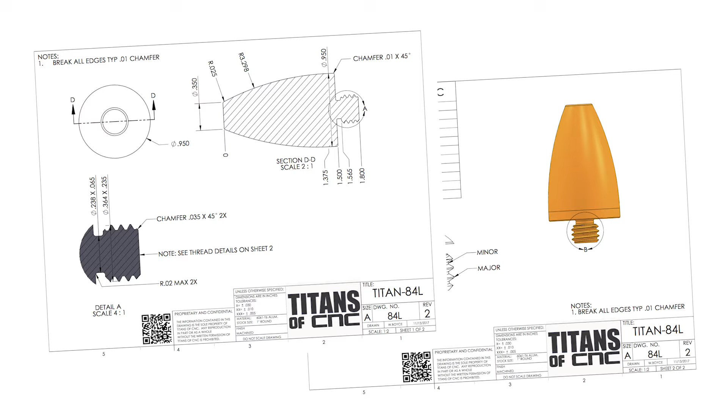The very first thing we're going to do before we start programming the part is make a small edit to the model. Make sure you're in your model workspace, go to your timeline, find where your thread is, right click on your thread, and hit Edit Feature.

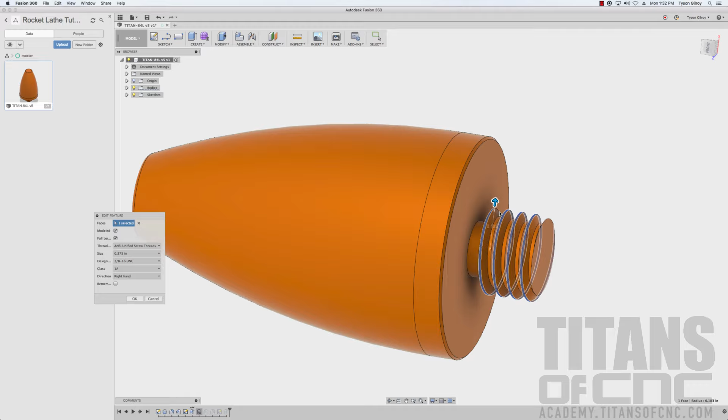The threads do look good in 3D, I really like them, but they're going to get in the way when we try to turn across them. It's going to think that each of those threads is something the lathe tool needs to turn on. So on this checkbox that says Modeled, let's turn that off. You can see the threads turned solid just now. You can still see there's a thread that's supposed to be there, but now it's just going to go straight across when the tool goes. We'll hit OK, and we're ready to start programming.

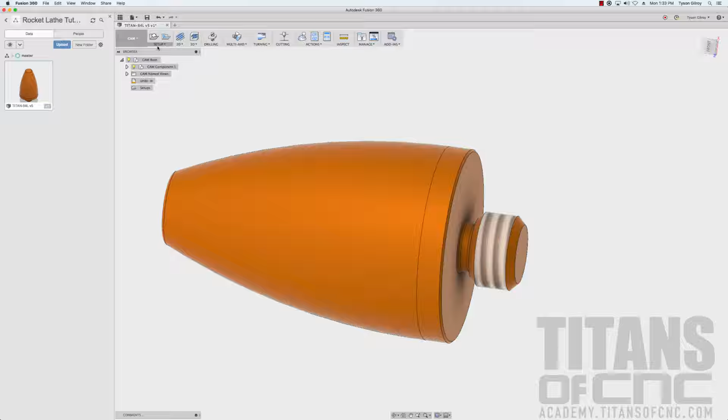Let's go to our CAM workspace this time. We'll go to our Setup tab here, and hit New Setup. It's going to ask what kind of operation type we're doing—we're going to be doing turning.

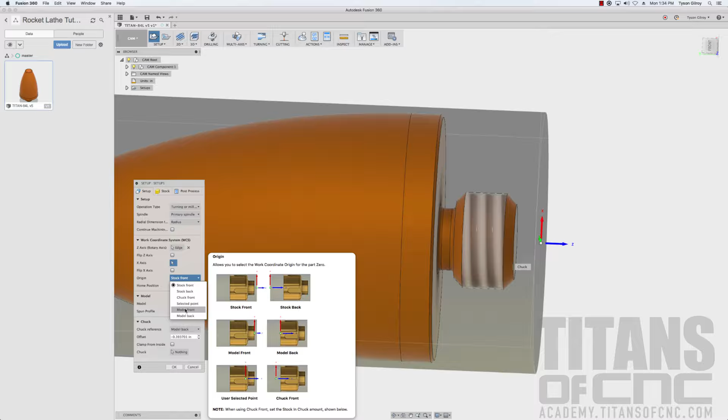For the work coordinate system, we need to set where the front of our part's going to be, so we need to set a Z0. I'm going to select this corner here, which I'll treat as the front of my part. That does look good, except our origin here is set to the front of our material. I don't want that, so for the origin, I'm going to go to model front rather than stock front. There we go—we're set now on the front of our part.

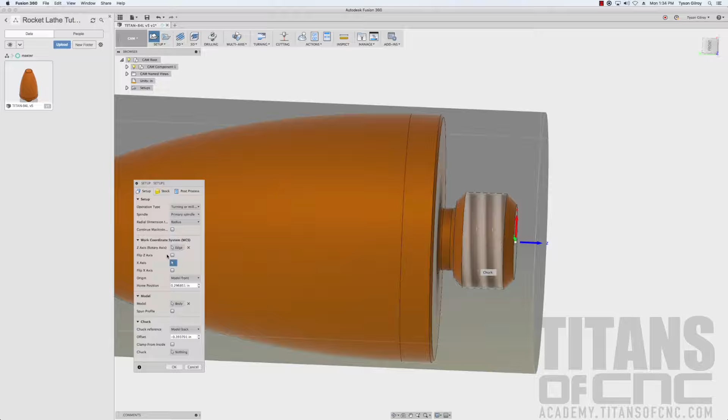That's going to be Z0, and everything is going to be programmed off of that point. I do that to almost all of my programs—I want the front of my part to be where the Z0 is. There's no more confusion when you're looking in your program: you know if you need to go 100 thou deep, you're going 100 thou deep from the front of the part. So we got that set. We don't need to mess with our x-axis or any of this other stuff here.

So let's go to our stock tab. Now we need to set our stock diameter, which I'm running a 1-inch bar. So I'm going to use 1 inch, but make sure that matches up with whatever you're cutting. For model position here, let's make this offset from the front. What that does is move your model closer to the front of your stock, so it looks more like you were running bar stock.

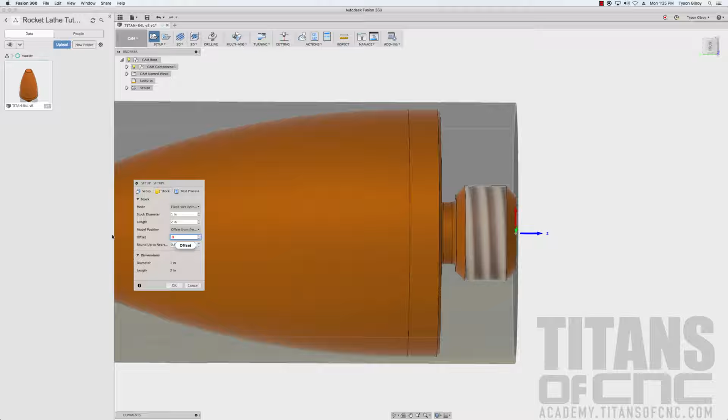We'll go to this offset tab here, and I'm going to put 20 thousandths because I want to do a 20 thousandths face cut. Everything else looks good there, so we'll hit OK, and we're ready to start doing our tool paths now.

We'll do our first one. We're going to go to Turning Face. We'll need to select one of our tools—let's go to our tool library. I'm going to select tool number 1, this is our 55-degree OD tool. We're going to be using constant surface speed and feed per revolution.

On almost all of our lathe tool paths, we will be using those. So for surface speed, I'm going to go 800 SFM. I'm going to limit our max spindle speed to 3000, and that's when it goes to its lowest point on your diameter—that's the fastest the spindle will spin. Feed per revolution, we're going to go 8 thousandths. A little bit slow, but we're learning.

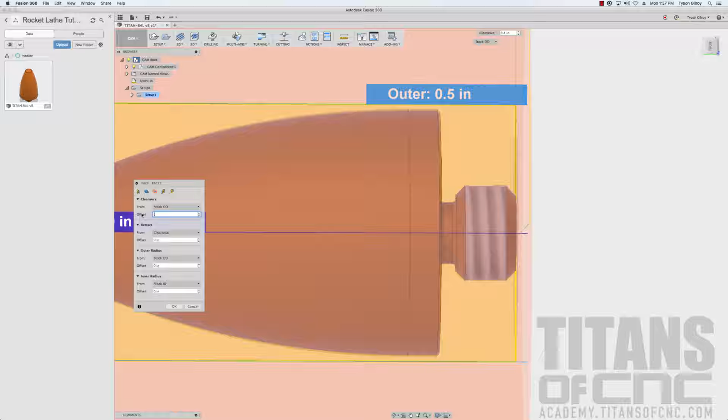We're going to go to our radii tab here, and for clearance, we're going to change this from 400 thousandths to 200 thousandths—bring it a little bit closer, not too close. Again, once you get better, you can bring it a little bit closer. Inner radius, just make sure it's set to 0. Stock ID, just center of the part right there. You don't have to mess with any of these other ones, so retract is fine, and stock OD is fine on that one.

For passes, we're going to use stock to leave, turn that on, and I'm going to leave 4 thousandths. Your last tab is your linking tab—this is going to decide your lead ins and lead outs for the tool, how your tool approaches and at what angle. For the lead in, I'm just going to use a 90-degree lead in, that's going to go straight down. For the lead out, I'm going to make sure the same as lead in button here is unchecked.

You don't want that on. And the lead out angle is going to be 45 degrees. I usually leave those lead in lengths—usually 80 thousandths is fine, though I usually do 40 thousandths. We'll leave those at 80 thousandths. So everything there looks good.

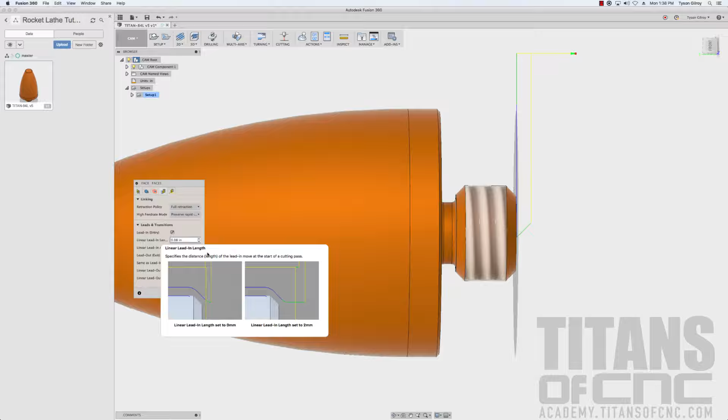Hit OK, and we got our first tool path done—one face pass going about 4 thousandths away from the part. We'll go ahead and bring it closer later once we do our finished passes.

We're not done using that tool though, so I'm going to go to turning, and this time I'm going to do a turn profile. We're going to cut across the OD of the part. It's already got our tool selected, so that should be tool number 1 there. And you're going to make sure that we're using outside profiling. Our direction is front to back, so from the front of the part to the end of the part. And your grooving tab, we're going to allow axial and radial grooving. So what that is, it's going to let us turn into the part a little bit, or as they call it, we're going to do undercuts.

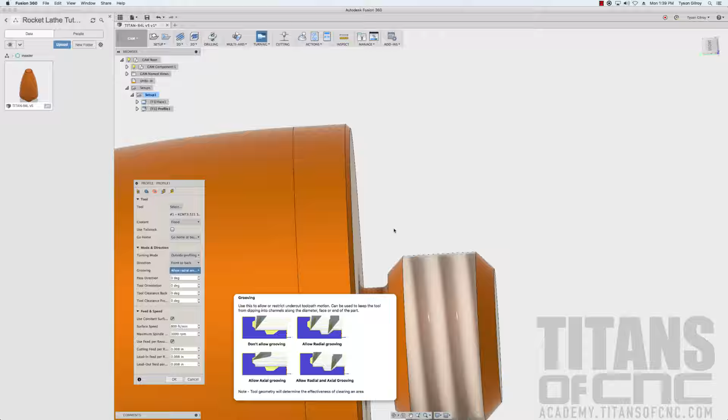Your speeds and feeds are going to match up with whatever our last tool was: 800 SFM, max spindle speed of 3000, and a feed per revolution of 8 thousandths.

Go to our geometry tab here, and we need to tell it where we want to cut. So for the front, I'm going to select stock front, so it's going to start where it thought the material was. That's fine—I just want it to start at the front of the part there. Stock front will give it a little bit of space from the front where we faced.

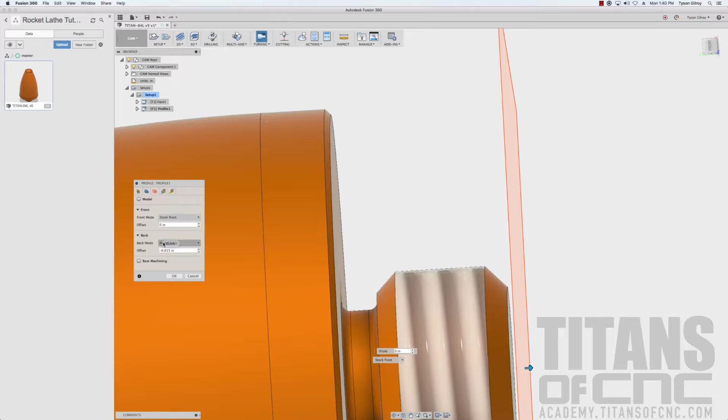For the back, I'm going to hit selection—I'm going to hit this point right here, and for the offset we're going to make it 0. What that's going to do is turn up to this chamfer here and stop there. I don't want to turn the rest of this part just yet because I want to do the front of the part, get the threads done and everything, and then once the front's done, we're going to do the back. The reason is it's going to get pretty thin back here, so we'll do all the work up front first and then take care of the back work.

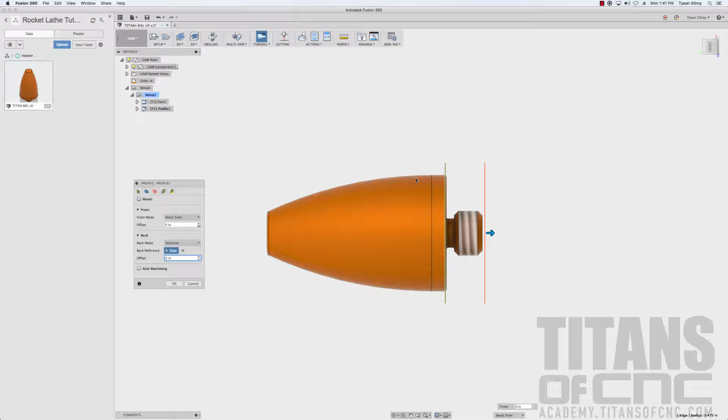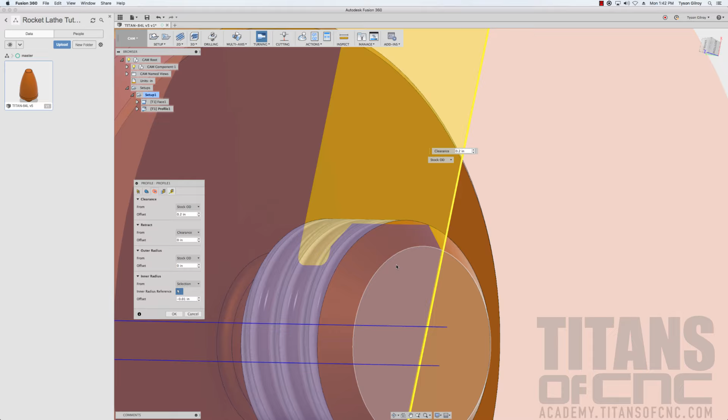So let's go to our next tab, the radii tab. Your clearance, you can leave that at stock OD, 200 thousandths away. You can leave the retract and outer radiuses alone. We're going to go to our inner radius here and use selection. We need to make a selection on where we want that inner radius to be—I want it on the front of the part at the end of this chamfer, right there.

And for the offset on that, we're going to go -10, so it's going to start just a little bit below that chamfer there and end right at the top of that chamfer. That looks good, we'll hit OK.

We're on our passes tab here. The most important thing on this tab is to make sure the finishing passes tab is turned off—I don't want to do a finishing pass just yet. We're going to turn on the roughing passes tab, and we're going to do 80 thousandths depth of cut. For the stock to leave, we're going to leave those at 4 thousandths.

Go to our next tab, the linking tab, and for the lead in we're going to do a lead in of 0 degrees this time—it's going to go straight across. For the lead out, we're going to use a 45-degree lead out. You can go ahead and leave the lengths at 80 thousandths, that's fine. And everything there looks good, so we'll hit OK.

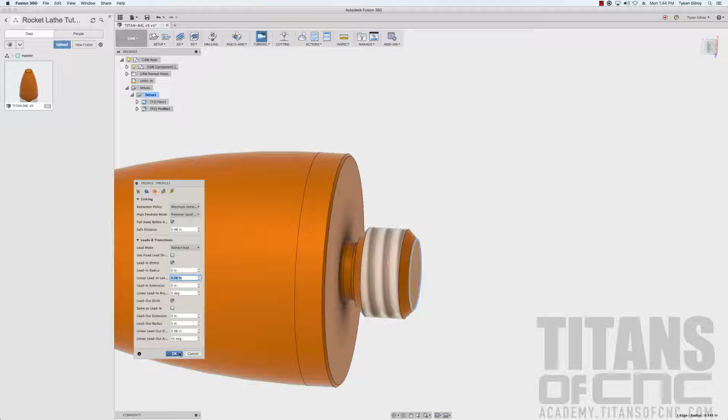Now we got our first pass done. You can see it goes into that groove a little bit, but it can't quite go down all the way because of the angle of the tool. So we'll take care of that in a second.

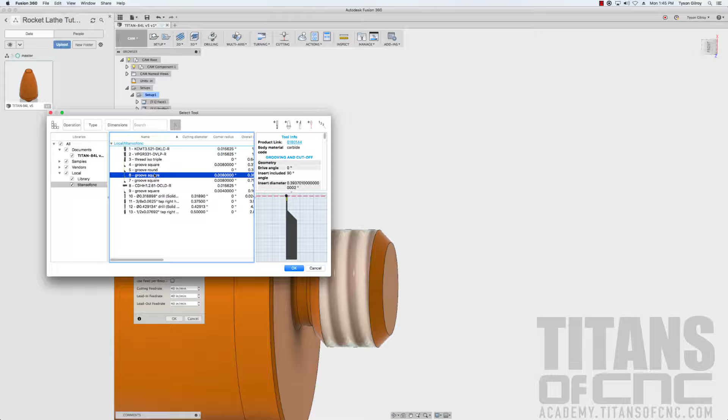The next thing we're going to do is go to turning, and we're going to go to turn single groove. We'll select our tool from the tool library—tool number 6, this is our 63 wide groover. You're going to make sure that we're on outside grooving. For our speeds, we're going to use a surface speed of 400 SFM, maximum spindle speed of 3000, and for your feed per revolution, let's go with 3 thousandths.

Next tab, geometry—we need to select where we want to cut our groove. We do have one problem with Fusion single grooving: if you have a fillet radius in your part, you can't actually select the corner or the fillet radius. You can select the top of the fillet radius, or you can select the bottom of the fillet radius, but you can't actually select the fillet radius itself.

So you need to select the furthest point on the tool that you're going to be cutting. In our case, our tool, we want to cut along this wall right here, and we want to go all the way to the bottom of the groove.

So you have two options. You can either go to the model and delete that fillet radius right there, and then on this page here you'll be able to select that corner. Or you can go ahead and select this corner here, and tell the tool to offset it down as big as this radius is. So when I get to that page, I'm going to offset this minus 16 thousandths.

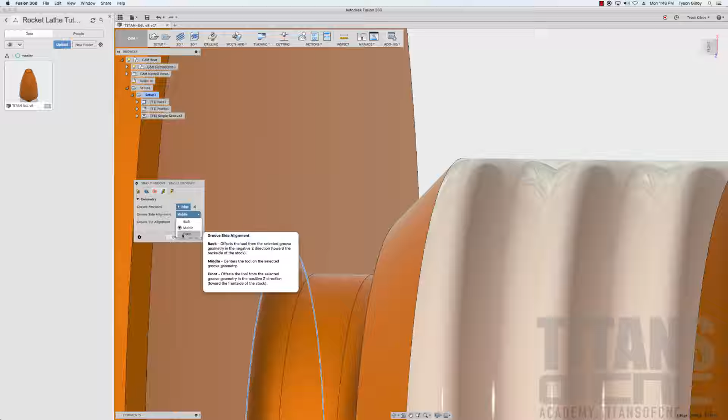Before we do that though, regardless of which way you approach this, you'll need to set your groove side alignment. That's going to be basically where you touch off your tool. So rather than the middle of the tool, we want this set to the front of the tool. And you can see our preview suddenly appeared right there. That's good there.

Clearances, we'll leave this at 200 thousandths. And if you don't already have it, you can set that as your default. Make that our default. All the rest of this is fine. You can leave those at 0.

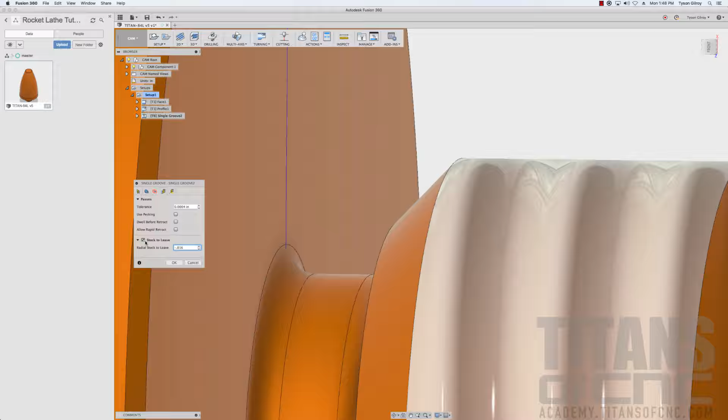Stock to leave, since I have that fillet radius there, I'll check that, and we're going to put a negative number, and I'm going to just tell it what that fillet radius is. So I'm going to go 16 thousandths. But if you deleted that fillet radius and you just have a sharp corner there, you can just select that corner and you don't have to leave any stock. Just set that at 0.

All right, so let's hit OK. And as you can see, we've got our groove there. You can see our fillets on our model are bigger than the fillet of our tool, but regardless, it's still in spec there.

So we got our thread relief done. Let's get the thread in there. Go to turning thread, select our tool, go to our tool library. We're going to select tool number 3, which is our OD threader. For your turning mode, we're doing outside threading.

For your speeds and feeds, we're going to turn off constant surface speed on this tool. And I'm just going to turn this at 1000 RPM.

For the feed per revolution, this one's a little bit tricky. So the feed of a threader goes at a certain speed in order to give it that spiral that a thread has. So the speed of your tool is basically going to be what the pitch of your thread is on a lathe. Basically, the inch per revolution is going to match up with the threads per inch of what type of thread you're cutting.

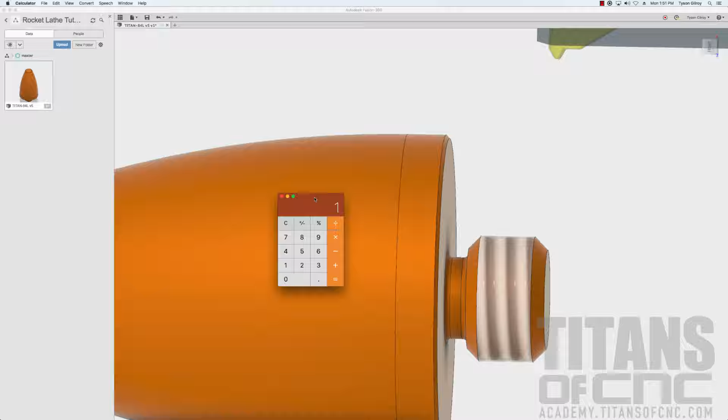So you need to type in the pitch for your feed per revolution. So we'll get our calculator here. In order to figure out the pitch of your part, we're going to take 1 inch and divide it by how many threads per inch on your part. So we'll look at our part. We've got a 3/8 by 16 thread. So just go 1 inch divided by 16. That'll give us 62.5. You're going to be using that number, so write it down or memorize it, or just reference back to this page here. But we'll be using that in a second. So 62.5, 62.5. All right.

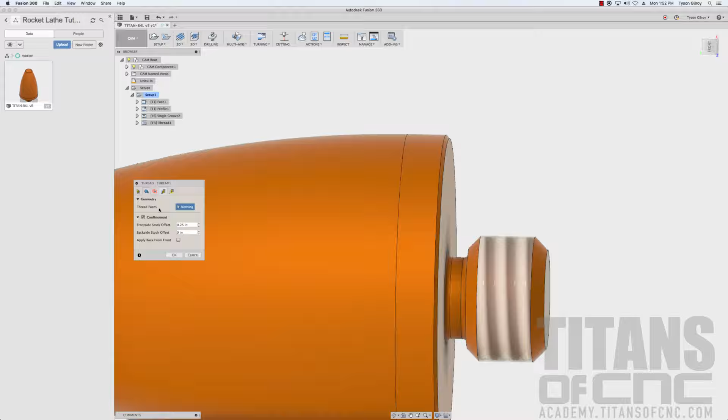Go to our geometry. We'll need to select where our threads are cutting. So select your thread. This is a little bit hard to see because we have thread fade on, but you can see it's trying to back off on that thread there. We're going to go to our passes tab real quick, and I'm going to turn that off so it's a little bit easier. So fade thread end, make sure that's turned off.

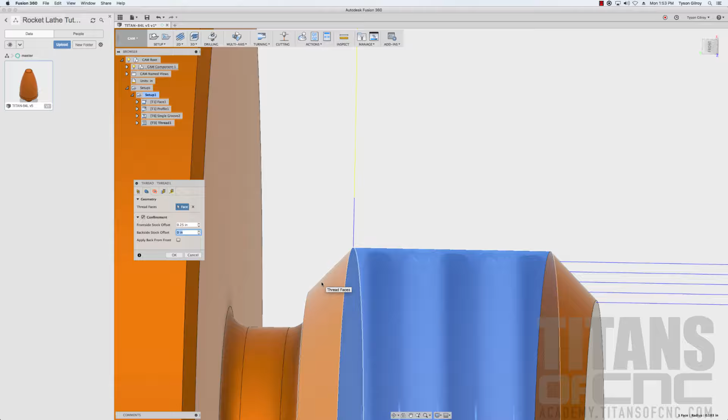Go back to our geometry here. So this here, you want this threader to go all the way to the front of this part here. You don't want your thread to just stop there, otherwise it's not going to turn far enough. So on our backside offset here, we're going to tell it to go further. To figure out how far, you're going to take the distance of this chamfer right here, along with the distance of how wide your thread relief is. So we'll go 60 thousandths plus 35 thousandths. So now our thread will turn far enough and go into the thread relief.

Go to our radii, 200 thousandths for the clearance, passes. Now you're going to make sure that we're doing a right-hand thread.

For our thread depth, we'll also have to bust out our calculator here, and we're going to do a little bit of math here. We need to tell it the distance from the outside of the thread, or your major diameter, to the inside of your thread, or your minor diameter. So what we need to do is take the major diameter, which on your part is the OD of the thread, which is 0.367.

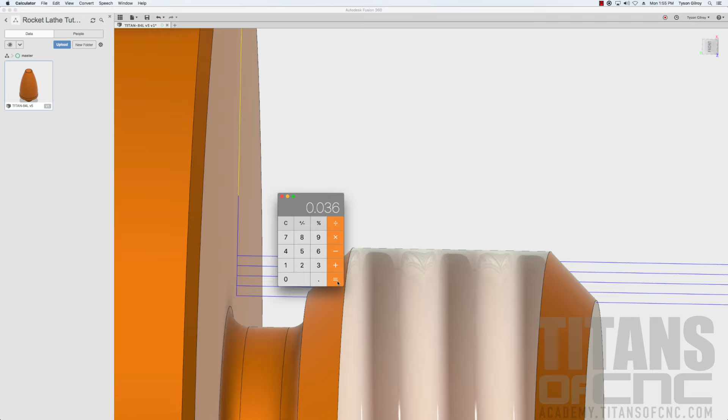You're going to subtract it from the minor of your thread, which is 0.295, and then divide it by 2. That gives you 36 thousandths. We'll go here for our thread depth: 36 thousandths.

For your number of step downs, this is how many passes we're going to do on your thread tool. We're going to do 13 passes. That seems like a lot, but your threaders aren't very sturdy tools, and it's going to be a very fast pass. For your thread pitch, we're going to take that number we put in our feed rate earlier when we calculated the thread pitch. So when we took 1 inch divided by 16, that's going to be 62.5.

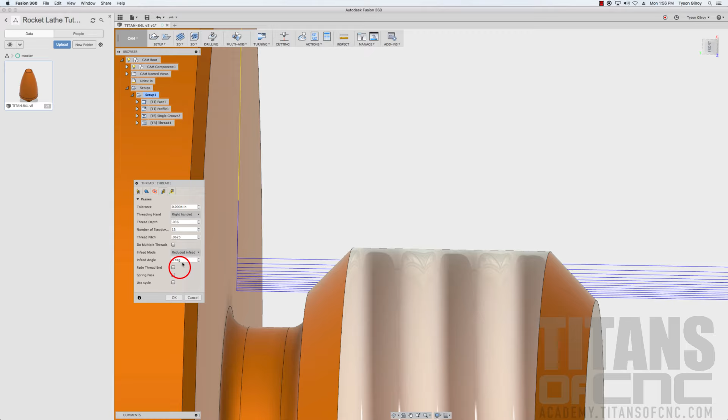For the in-feed mode here, I'm going to do reduced in-feed, and for the angle, 29 degrees. We don't need to check anything else here, so we'll hit OK. And we got our thread pass done.

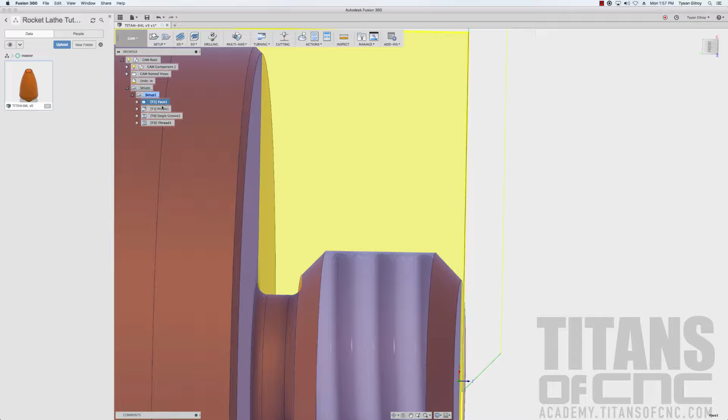So we're almost done with the front of our part here. We're going to add in our finish passes. The way I like to do this is we're going to select our 2 earlier rough passes, our face pass and our OD pass. We're going to right click and hit duplicate.

Then I'm going to take my newly duplicated passes here, select those, and drag them to the bottom of our list. Now we're going to edit those passes and turn them into finish passes.

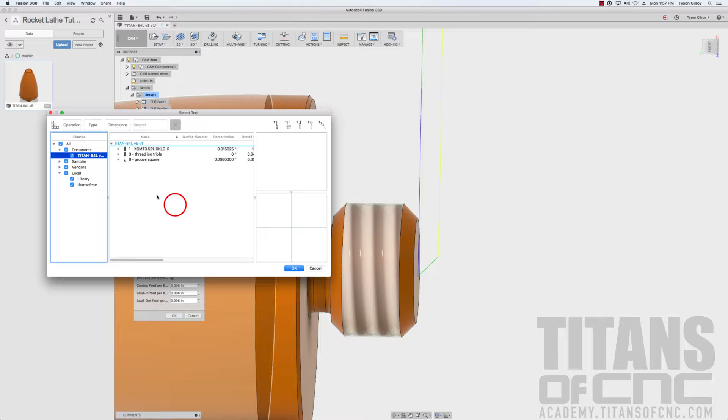So we'll start with the face tool, select which tool we're going to use, and I'm going to select our finisher, tool number 2. For your speeds and feeds, we're going to change this to 600 SFM, still use our max spindle speed of 3000. We can leave our feed rate at 8 thousandths.

For our geometry and our clearances, those should all be the same as the roughing tool, so we're fine there. But on the passes tab, we're going to uncheck stock to leave. Now it's not leaving any stock and it's going to do a finish pass. Linking, we can leave that all the same as our roughing pass.

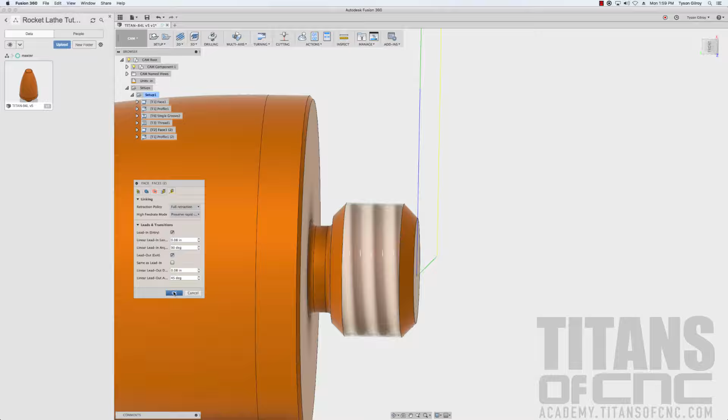So we'll hit OK. Now we'll go to our duplicated profiling tool here. We'll edit that and do the same thing: select our tool, that finisher that we just used, tool number 2. Turning mode and everything should be the same as that previous tool. We're good there. Feed and speed, 600 SFM.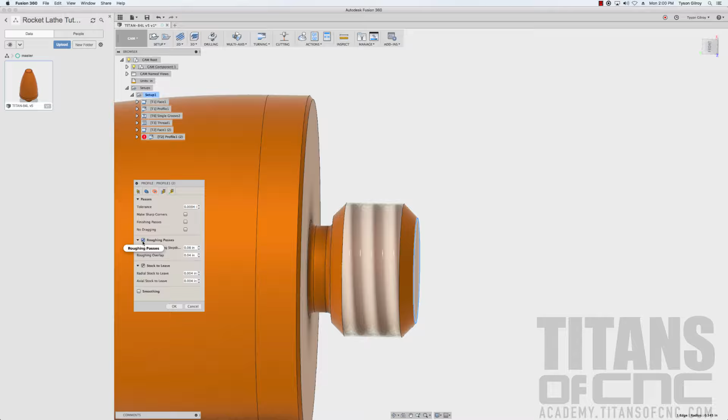3000 max surface footage, feed rate of 3000ths. We still got our geometry selections from when we roughed it out, so we're good there. Our clearances are all still the same. On our passes tab, we're going to uncheck roughing pass, and uncheck stock to leave, so we have one finish pass. Let's hit OK, and we got our finish pass done.

Look how easy that was. It's one of my favorite things about Fusion, being able to easily edit a roughing pass and turn it into a finish pass within a blink of an eye. Alright, so the front of our part's all taken care of. Let's take care of the back end now.

Before we get started with the rest of our part, if you look at our tool list here, we have some tools that are labeled almost the exact same thing. So I'm going to go and give these labels: rough face, rough OD, grooves fine, threads fine, finish face, finish OD. That way I don't get these tools mixed up.

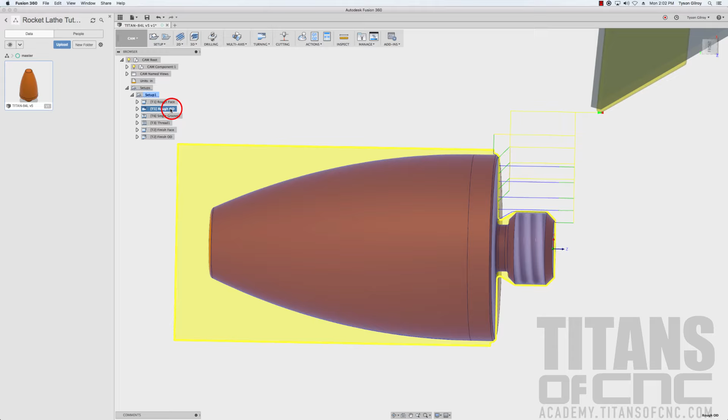So since I love duplicating things, I'm going to right click on this rough OD and we're going to duplicate it. Let's take this duplicated pass and drag it to the bottom. It's at the end of our list now. I'm going to label this one rough OD back, so I know that I'm roughing the back side now.

Now let's edit this pass. We're using our roughing tool again. Turning mode's still outside profiling and we still want radial and axial grooving. Our surface speed, I'm going to turn these down a little bit, so 600, and I'm going to drop the max spindle speed to 800 RPM. We can speed these up later, but I am worried from how little is holding on the end there.

So after my first part, I'm going to bump those back up and see how far I can go. But for now, we'll do 600 SFM and a max spindle speed of 800. Our feed rates will leave the same, 8000 should be fine. Now on our geometry here, we do have to make a couple of changes.

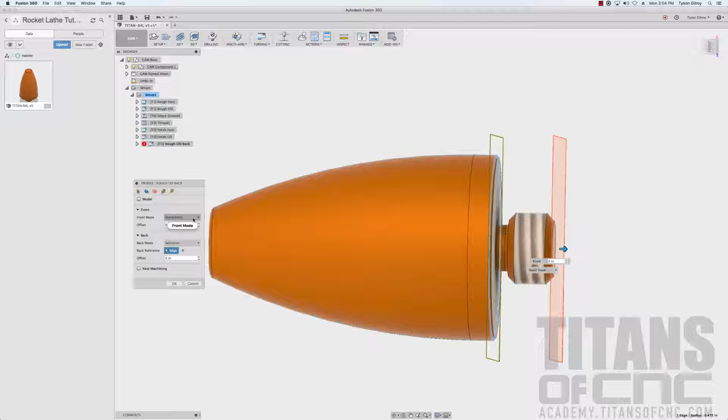For the front, we're going to go to selection. I'm going to select that point that we ended at the end of our rougher, so the end of our chamfer right here. That's going to be my front of the part. Don't need an offset there, so we'll go to our back here. We're basically picking up where we left off on our roughing pass. For the back, instead of selection, we're going to do model back.

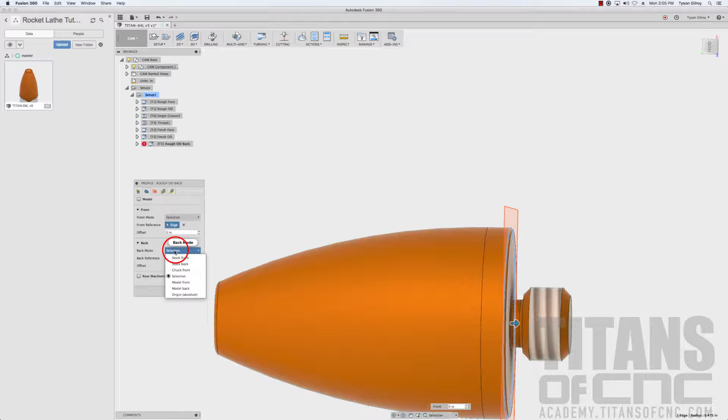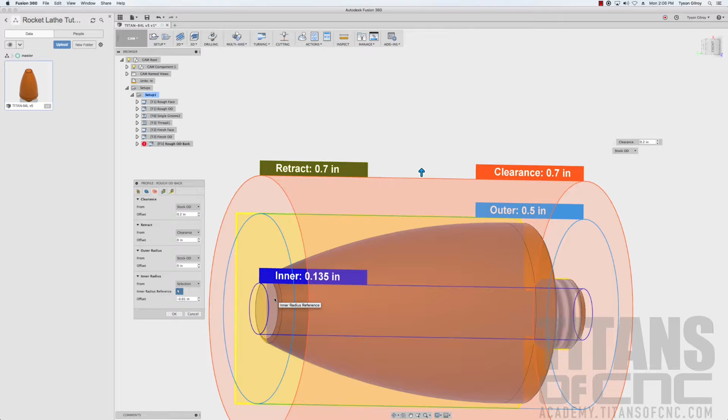On our offset, I'm going to go -15, just a little bit further past, because I want to use this tool to do this radius right here. So that's good. We'll go to our radii tab. Under inner radius, I'm going to uncheck this. We're still going to use selection, but I'm going to select a different point on the back side of the part, which is the end of this back radius. Let's click that, and now we're good. We can still leave that offset of 10,000, that's not going to hurt anything.

Let's go to our passes. For your roughing passes, we'll turn those down just a little bit, to a 60,000ths roughing pass. We can leave 4,000ths on the stock to leave tab, and make sure finishing passes isn't checked, which it shouldn't be since we duplicated the roughing pass. All our other stuff is good here, same as that first tool we did, so we'll hit OK. And we got our roughing passes.

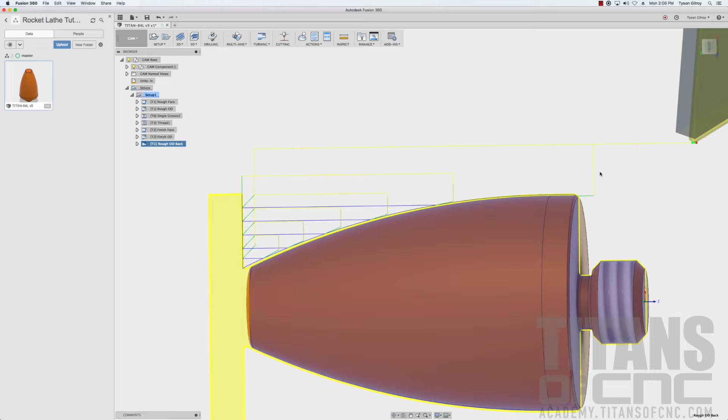Now if you remember, for our lead-in on our roughing pass, we did a straight 0-degree lead-in. But that doesn't make sense when you're doing your undercut, because now you're dipping into the part here. Fusion will figure out what angle to approach these undercuts once it starts digging into the part, so you're fine leaving that lead-in where it's at. It'll figure out the right angle to approach these cuts.

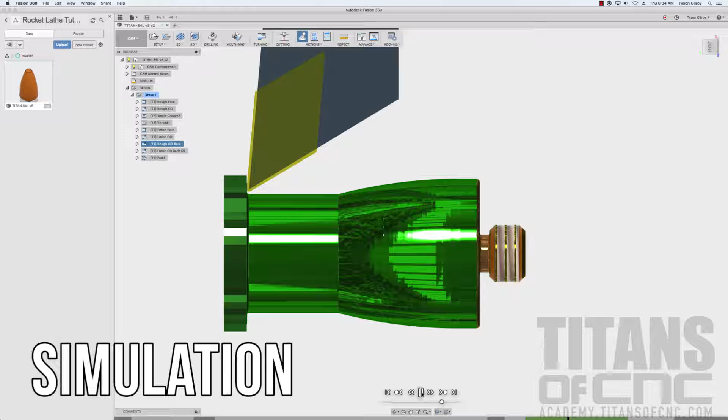So we got that done. Now let's take that pass and we'll duplicate it. We'll take the second roughing pass, and now instead of Rough OD Back, I'm going to name it Finish OD Back.

We'll edit this, and just like you did on the finishing tool, we'll select our finishers. Everything should be the same as the roughing. For speed and feed, we're going to go 400 SFM, limit our spindle speed to 600 RPM, and we'll use a feed rate of 3,000.

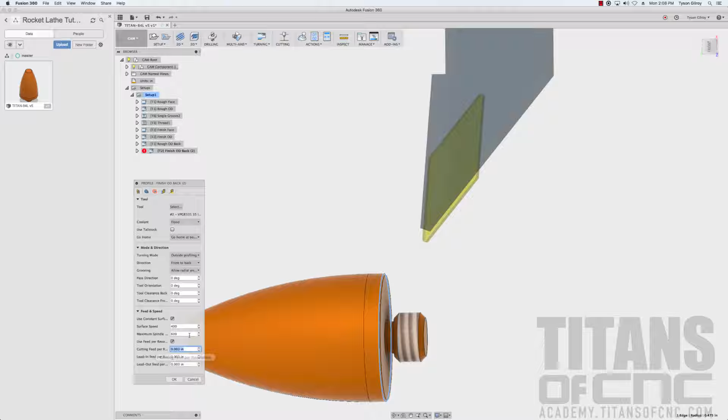Geometry, that's all the same as the roughing pass, same with our radii tab. So we'll go to our passes. We're going to uncheck roughing, and we're going to uncheck stock to leave. Now it's just one finish pass. We'll hit OK, and we got our finish pass.

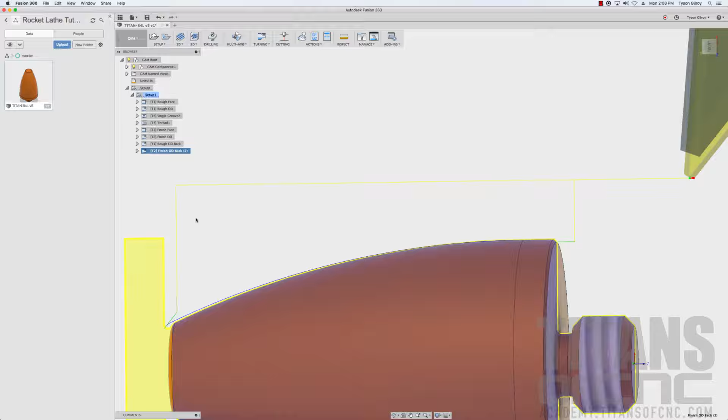Look how easy that was. All you have to do to change a roughing pass to a finish pass is just select what speed you're doing and uncheck the roughing tabs. So we got all our passes done. OD is all done and our threads are done.

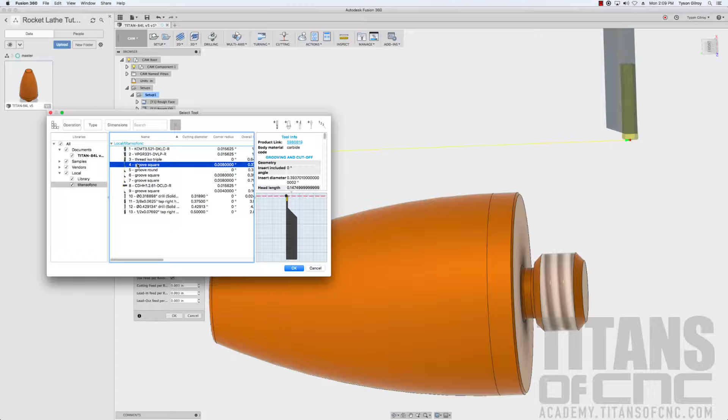So let's get this part parted off. I'm going to go to turning and go to turning part. Now it did select a groover, which is our 63 wide groover we used earlier, but that's not the one I want to use. So I'm going to go to our tool library and select tool number 4. This is our actual OD part off, it's 118 thousandths wide. For surface speed, I'm going to go 200 SFM.

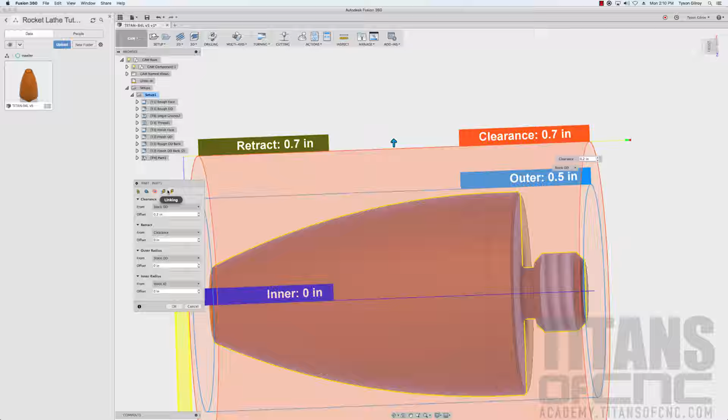I'm going to do a maximum spindle speed of 800. We can leave our feed per revolution at 3 thousandths 5 tenths, that's fine. It's already selected the back of the model for where our cut's going to be. Just make sure our clearance is set to 200, a little bit away from the OD of the stock. All of our tabs here, we don't need to check anything, just leave these all unchecked. We should be fine, we'll hit OK.

And now we got our part parted off. It's all complete, it was that easy. Did the whole thing in one operation. As soon as this is done, all you have to do is just clean up the little leftover bit from where it parted off and you have a done part.

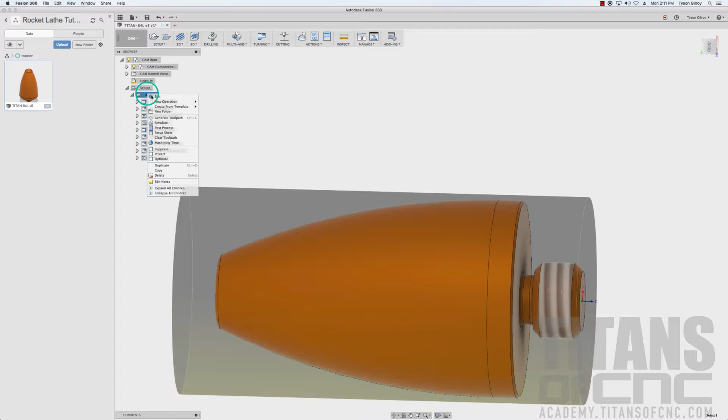Just to make sure, we'll click on our setup here and I'm going to go to simulate. We'll turn on stock so you can see the stock that's being cut. And let's play this, let's see what happens. Speed this up a little. So we got our OD roughing pass.

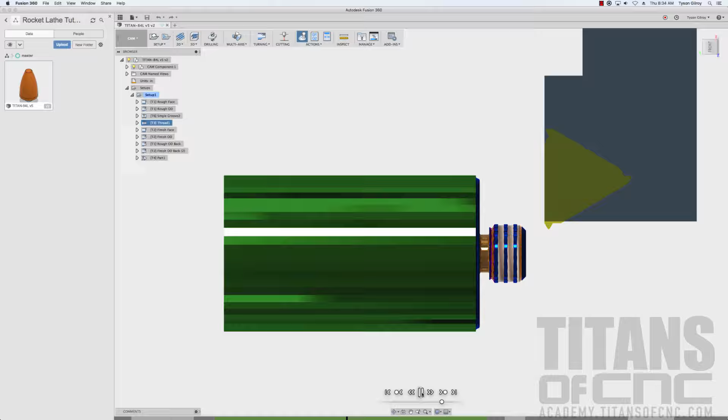We got our thread relief there. You have our threading pass. It never quite looks right when it's simulating, you can kind of get an idea, but what you want to watch out for is just making sure the front of the tool isn't going to rub up against some stock, or the side of the thread relief. It seems like it's a while, but it's actually going to go really fast in the machine.

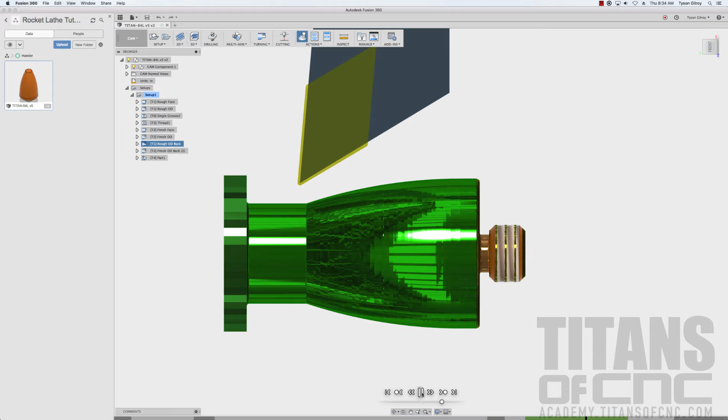We got our finish face and our finish OD part 1. Now we're going to rough out the back end here, going into the undercut there. Now it's going to do a finish pass. Look at that. Finally, it's going to do the part off. And there you go, one up and done.

All right, our part's all programmed. That wasn't too hard, right? So all that's left to do now is we basically just need to post our program and make sure our tool numbers match up with our tools in our machine. And we have plenty more lathe tutorials to do, so I will see you then.